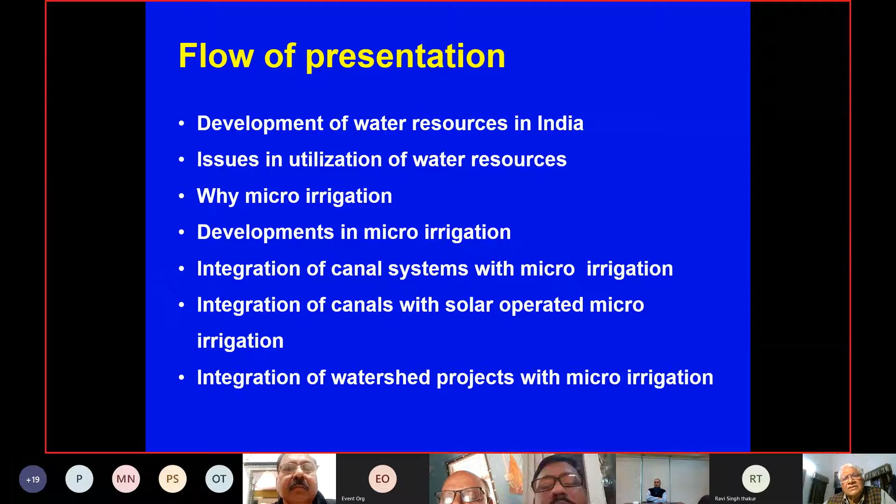हम माइक्रो इरिगेशन की बात क्यों करना चाहते हैं और माइक्रो इरिगेशन के डेवलपमेंट्स क्या हैं। Micro irrigation is not a very simple thing as we all understand. And then how can we connect it to large systems, micro irrigation's integration with large systems? And not only canal systems, but solar operated micro irrigation with canals. And then watersheds and water harvesting schemes and projects - how can they be integrated with micro irrigation?

Well, I need not take more time on this. You all understand that we have very limited water, and whatever water is available, only a very small component, 3% of that is usable. And out of that usable, 66% we are taking for agriculture. So agriculture, since it is a major consumer, its major responsibility also is there to use the water as efficiently as possible.

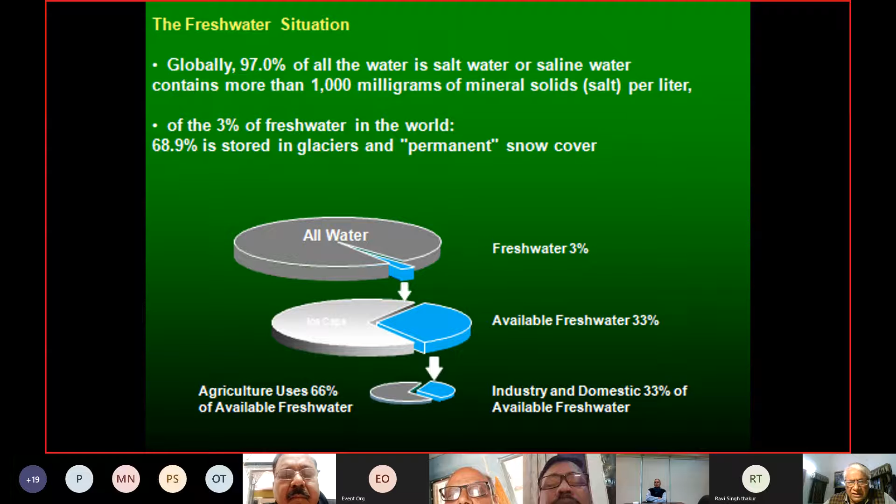Well, I will not go into the small video that was there, I'll just skip because of the time. Let's come straight away to very general statistics. You all know it, but just for the sake of making background for the real topic - we all know how limited water resources are. It is just 4% of the world. Land area even less, 2.3%. But population is not 16, but 17% today. So 17% population we have to feed, having only 2.3% of land area and 4% of water resource.

The demand of water for other sectors is growing very fast. We also know that other sectors like domestic, industry, and recreation facilities can pay more for water. So all the competition we are going to face in future days will be for agriculture. The blue map shows the distribution of rainfall, and luckily in this country we have the maximum variation possible, from zero rainfall to maximum rainfall in the world.

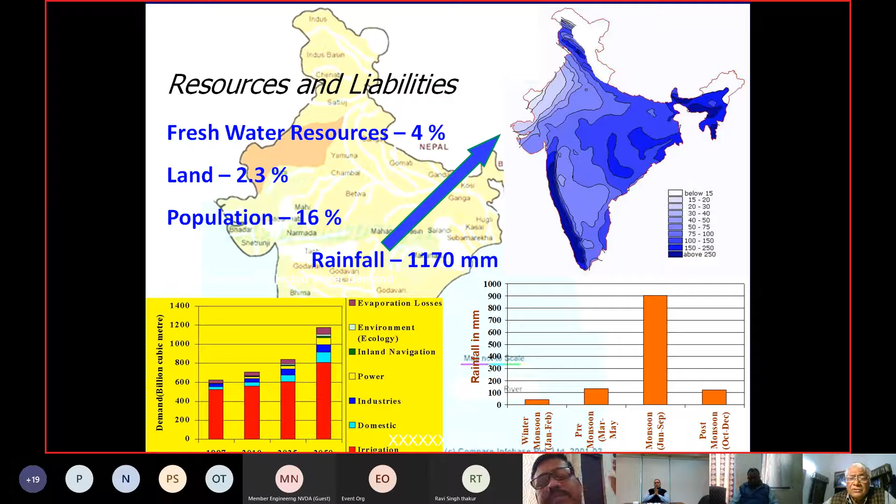This is an asset because we have the climate such that we can grow anything, any plant, any variety within the domain of our country. This is not possible in all countries, but our country gives us the possibility of growing anything.

Now, simple mathematics, you all are familiar that 4,000 billion cubic meter is available. Out of that, ultimately we are using only 728 billion cubic meter as surface water. So I'll not go into more detail.

If you look at how we have progressed in water resources, initially the water was under the control of the community. We had tanks, lakes, and all were under the control of the community. Every village has got 1 or 2 ponds, and the control was with the villagers, the total community.

There was very little intervention from the government side, about 20%, and individual interference was very limited, about 5%. But in the mid duration, the community control started decreasing, because the government intervention through construction of canals and tanks, the control started shifting to the state, to the government that you have nowadays.

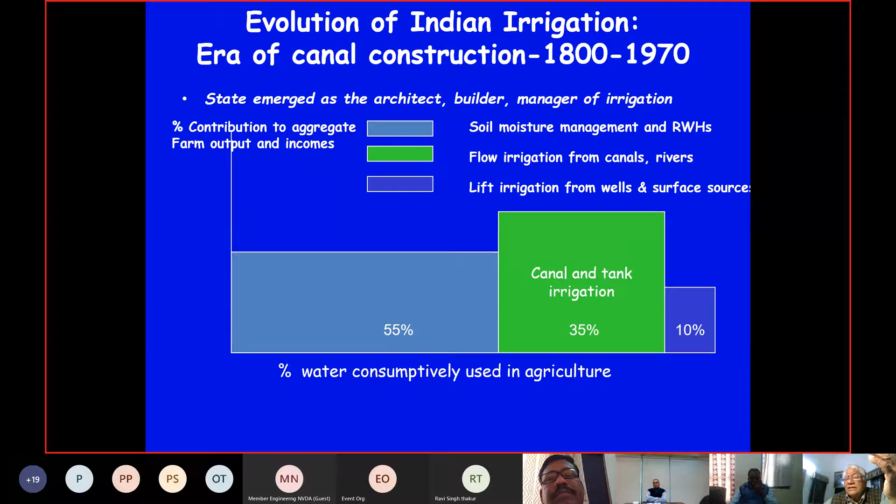And then individual control also started increasing, because individuals were somehow not satisfied, not getting whatever they wanted. So they started using water resources on their own, by their own wells. And the situation lately is that individual control has increased to a great extent, more than 55% of the total water resources are now under the control of individuals.

This is because of several parameters, several factors. Our community did not function well. The government intervention and control on water resources was not liked by the community and the individual farmers. Farmers found it more convenient and under their control to have their own tube wells, and started exploiting that, really senselessly at several places.

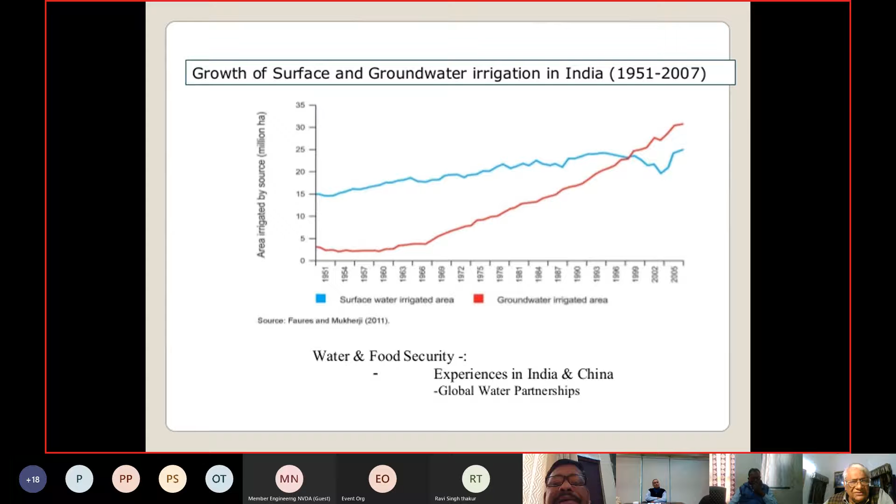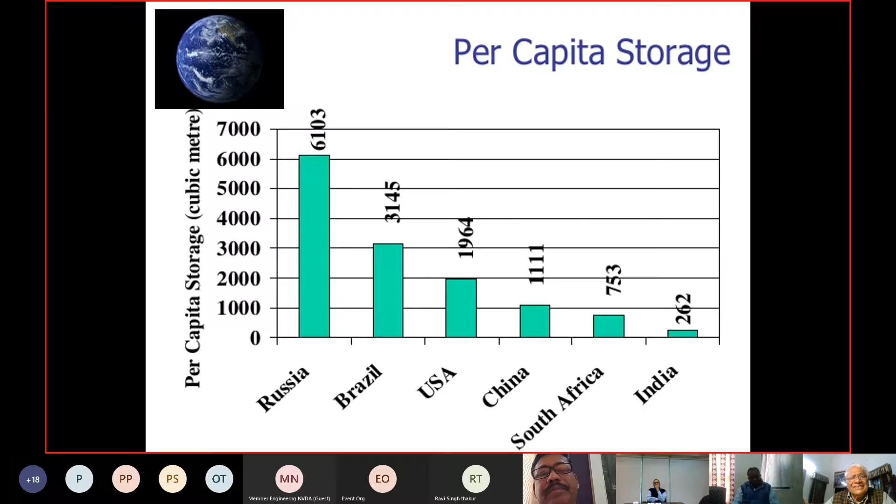On the other hand, all the government interventions and constructions of big dams, the total storage we have for emergency, is the least among all the big countries: Russia, Brazil, USA, China, South Africa. And if you want to go for more large dams, you know what sort of resistance we face. You have the best experience of the resistance given by different lobbies.

Notwithstanding that, coming back to the reality: population is growing fast and the water resources are depleting. The per capita availability has reduced from almost 5,500 cubic meters to just around 1,000 cubic meter per year per person.

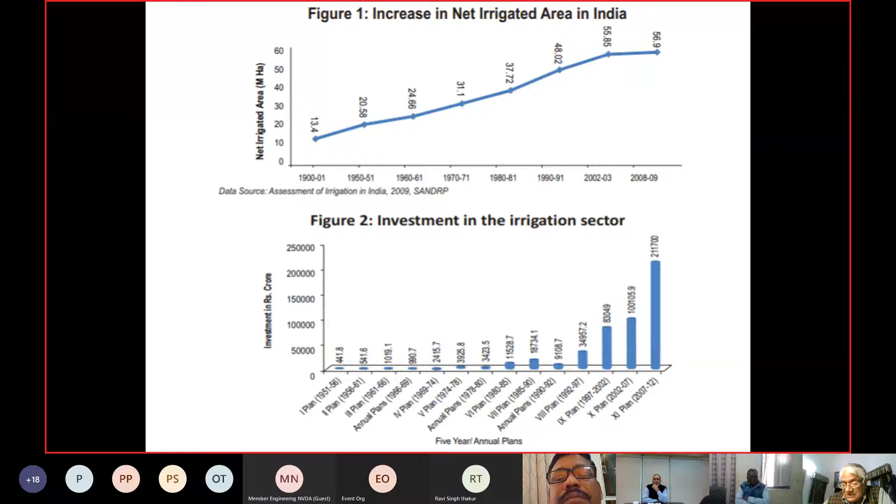So coming back to this, we cannot say we have not done enough. The government has done really wonderfully well in the development of our water resources, particularly after independence, and it is exemplary. There is no other example in the world. We are number one in developing water resources during this period, particularly for irrigation, by investing a huge amount of money, because increasing the irrigated area cannot come without cost. It comes with a cost as per our traditional practices. Now we'll have to look to something else.

But what is the negative side? The negative side is the gap between the irrigation potential created and the irrigation potential utilized.

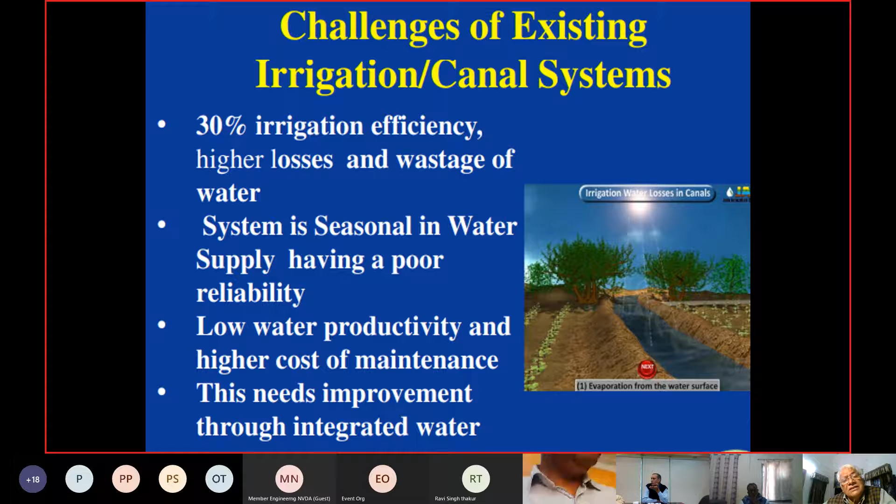Looking at the real issues, efficiencies are very low, particularly in our large canal systems. The seasonal matching of water availability from the canal with when the crop actually needs it is a bit difficult - there's an operational problem too. It's not a simple thing to do, but this is the problem, and because of this, low water productivity results, and efficiency goes down.

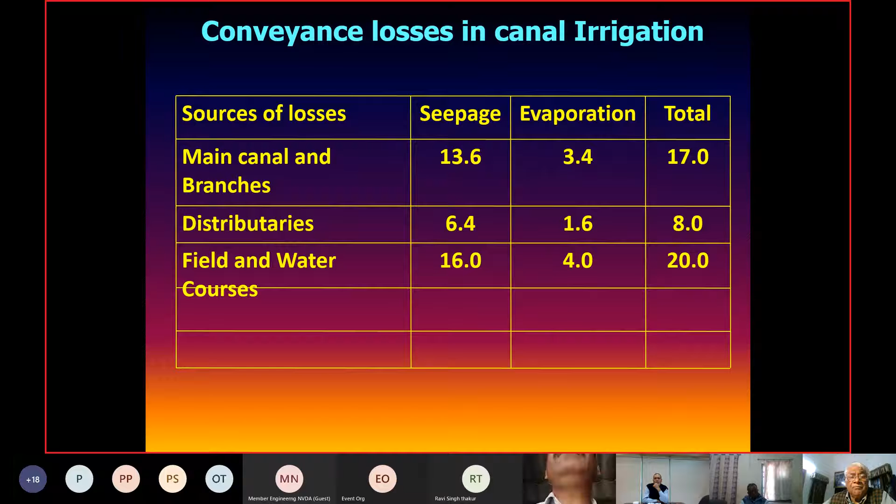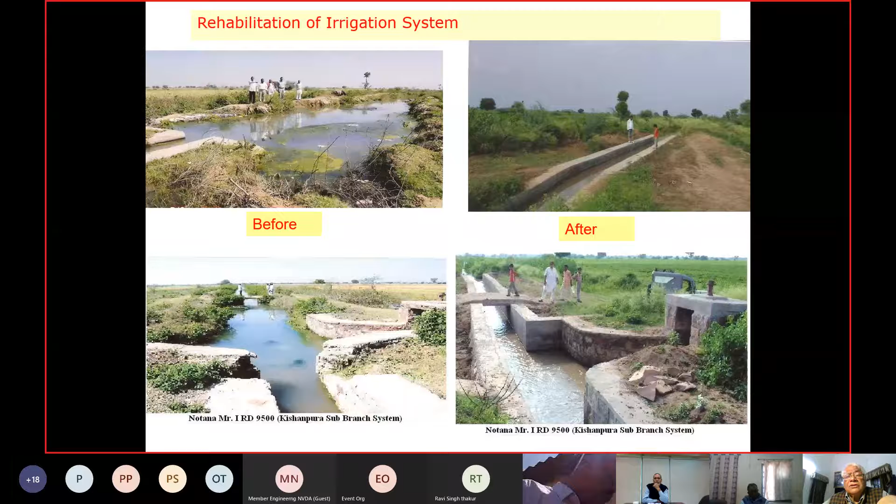Now, what can be done? Very simple things - the water courses, particularly the field water courses, are giving the highest losses. We need to address that, and how to address it is at least through proper maintenance. Maintenance of our distributaries and minors plays a very significant role.

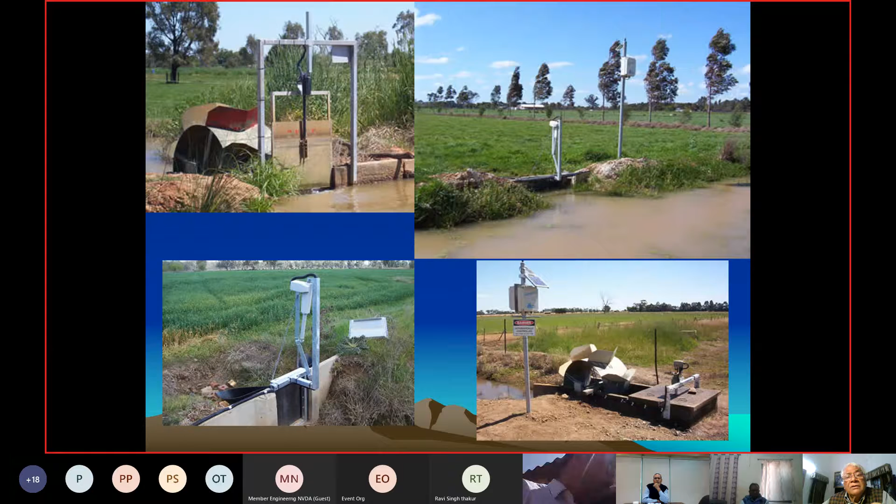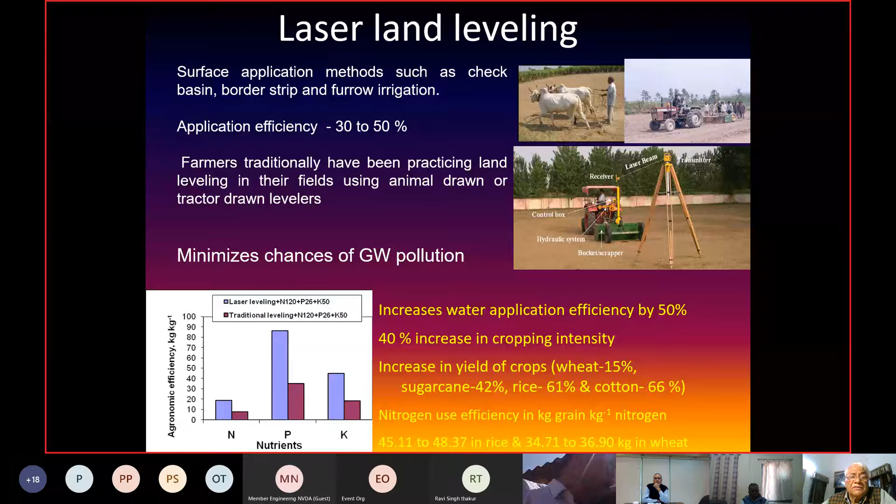What we are not doing, and what we need to do in future, is implement controls and regulations on the canals which can really be automated, like you are seeing at this automated gate. And more than all that, all the area being irrigated, if it is plain area, must be precisely leveled for higher water use efficiencies.

The last thing we can add into the existing canal system is automation - at different stages: at the distributary head, at the canal head, at the water course head, and at the field level, as you are seeing with the solar operated hydrant and metered pipes.

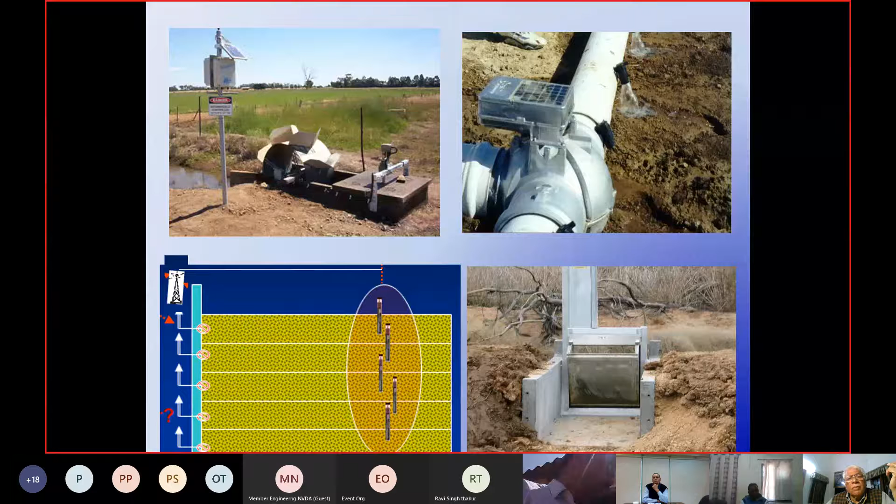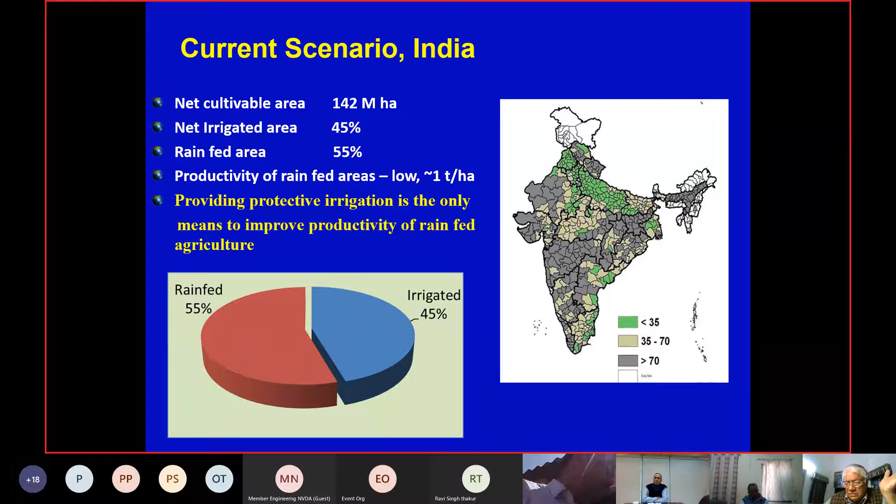With all the facilities and activities we have done, we are still 55% rainfed in the country, and that is very critical for our survival and food security. What are the options available?

The options are that the conveyance and distribution system has to be completed, which the Prime Minister, through all his might under PMKSY, is doing by selecting 99 projects and completing them fast, and Madhya Pradesh is doing very well in that. I think that's the way you can increase the irrigated area.

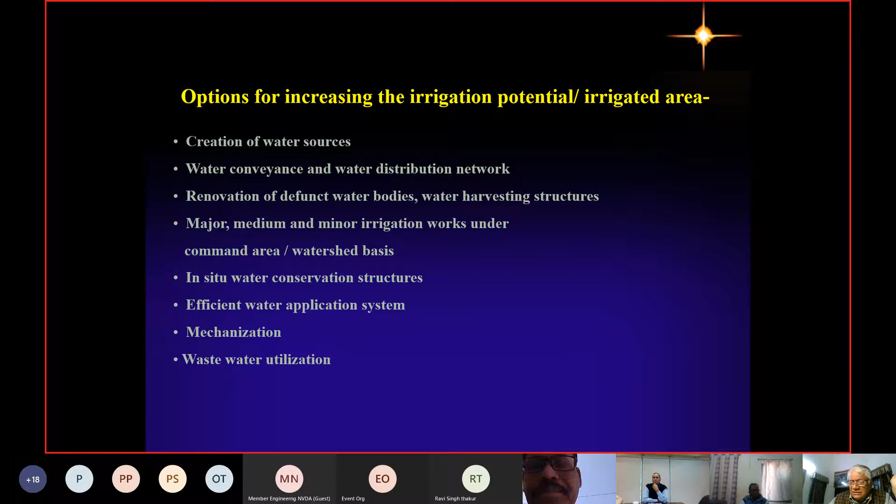And then major, medium and minor irrigation works under canal commands and watersheds have to be taken up seriously. In-situ water conservation, efficient application, and mechanization - these things are to be taken up simultaneously.

Now, this is a small picture I have taken from village Talwar in Alwar district. You can see just a 2.5 to 3 inch pipe from the well, and then an earthen channel in almost sandy soil. In an earthen water course, they are taking this limited quantity of water and carrying it for a few hundred meters. You can understand the amount of losses taking place.

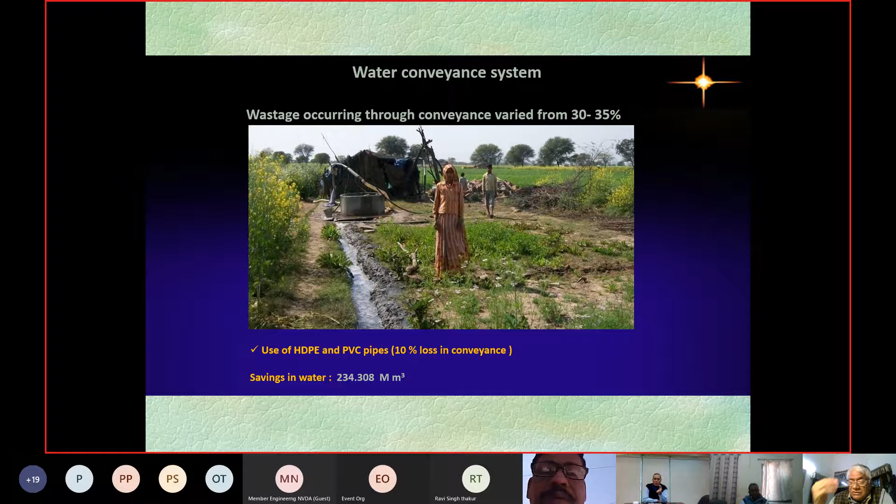Is this the way we should be using our water resources? Is this the way we should be using our energy, with this being run by diesel? You can understand the cost to the farmer for irrigating fields.

I have already discussed that a lot of investment has gone into developing water resources through canals, tanks and groundwater. When it comes to utilization, we have different methods - we all understand surface methods like check basins and furrows, and then micro irrigation.

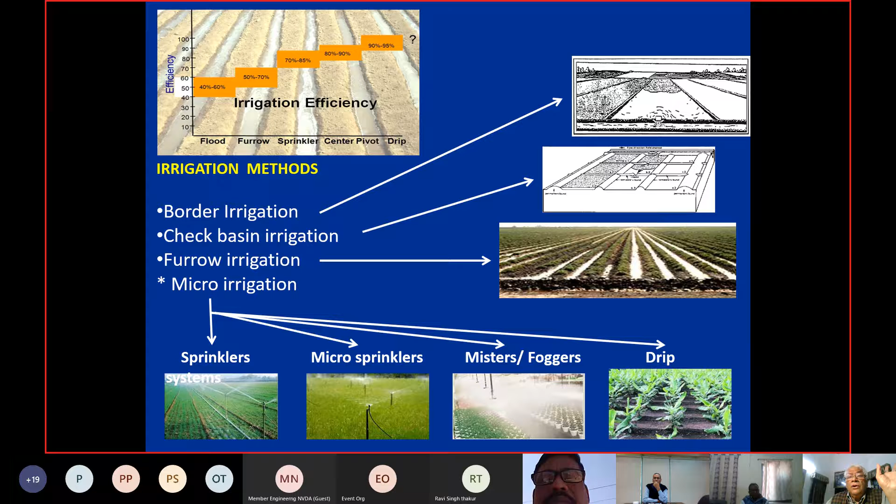This is the simple system of micro irrigation. The concept is very simple - from the source, whether it's a well, tank or canal, you convey the water under pressure through enclosed conduits to individual plants.

So what is done in this process? You are eliminating practically all the conveyance losses to zero, all the evaporation losses to zero, and there is no possibility of runoff because you are applying water at a controlled discharge and for a controlled duration.

If you are controlling the duration, you can ensure that water does not penetrate below the soil roots. And if it doesn't penetrate below the roots, there are no percolation losses. So practically you can eliminate all types of losses. Mind it, that plant requires as much water as it needs, whether applied through surface method or drip method doesn't make a difference. So that much water it needs, and we'll have to provide that much water.

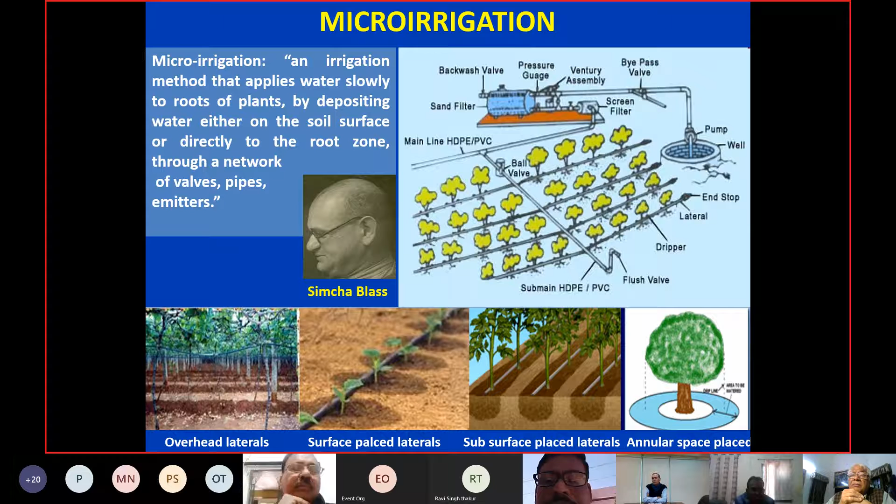The question is how the efficiency improves. It improves simply because we are able to cut down the losses. This micro irrigation system offers a scientific solution where we can practically make all the losses zero.

Besides saving water, it saves fertilizers. How? Because this micro irrigation system gives a possibility of applying water-soluble chemicals along with water, with very precise application into the field. It also saves labor, because once the system is laid out, you don't require labor to control or divert the water.

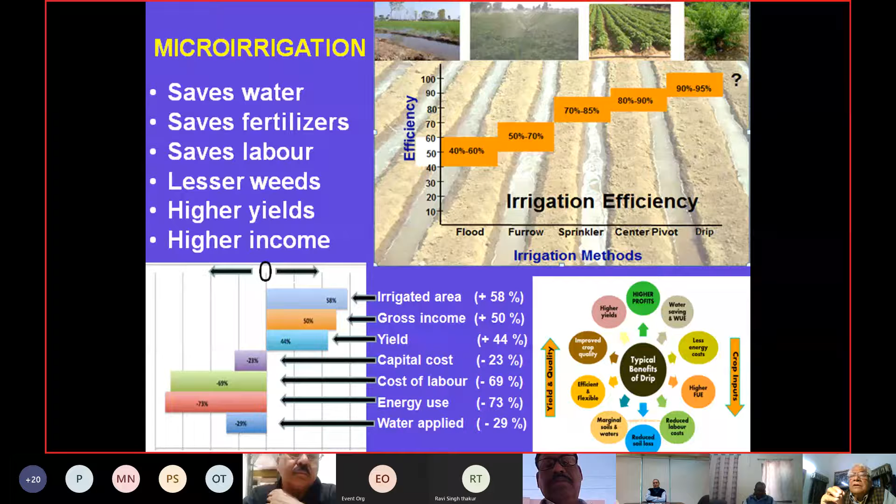Weeds will be less, yields will be high. Why? Yields are high because of two reasons: you are giving exactly the amount of water the plant requires, and there is no suffocation in the roots. Water is just adequate, and there is enough air for the plant's roots to breathe. So you give a proper environment for plants to grow, with enough oxygen and enough moisture.

You can see the simple concept. It started with points, as you can see in the very first figure. This was the very first concept of micro irrigation: you take a tube lateral and provide some kind of dripper or emitter, from where the water can come out just near the plant. It was used for orchards. Then later it was found that putting it on the surface creates obstructions for agriculture operations. So why not put it underground? That's how subsurface drip irrigation systems came into existence.

Then the question came: can we really use it for very closely growing crops? For example, if we want to grow onion or garlic, the plant-to-plant spacing is 10 centimeters maximum. Now in 10 centimeters, if you assume providing drippers at each 10 centimeters in the field, it is almost impossible. So we must have something else. So the system evolved where it is not only wetting points anymore — in engineering terms it is no longer a point source of water application, but a line source of water application.

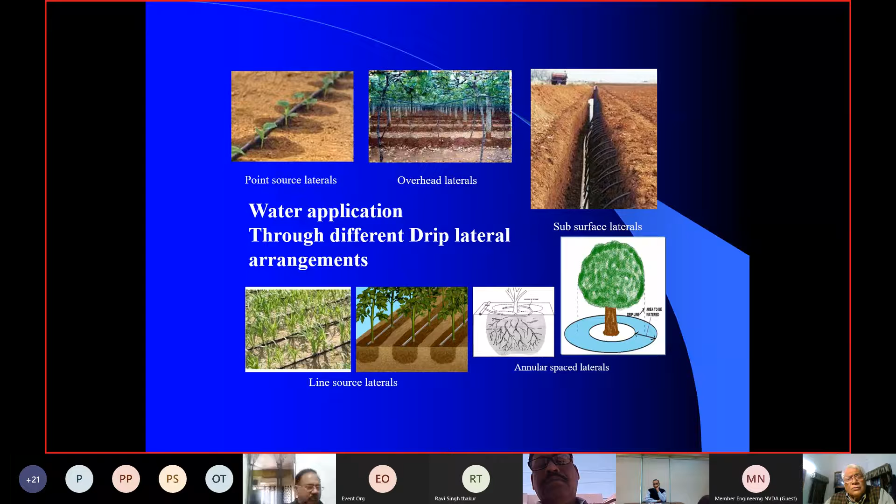Similarly, a lot of discussion, modifications, and research were done on large trees, on how drip can be applied on a large tree. It was found that if you adopt the first concept, it's not going to work — it requires much more water, not only in one direction but all around the plant. So there are flexible methods and flexible tubes laid all around. Another alternative found was to put two laterals on both sides of the plant and provide drippers closer to it. All sorts of such developments took place.

Ultimately, all these developments led to a situation where we can grow almost any type of crop — you can see here potato, onion, wheat, and finally we are trying, with a lot of research being done, for rice. Even for rice, it's being reported that the drip system is really a water saver.

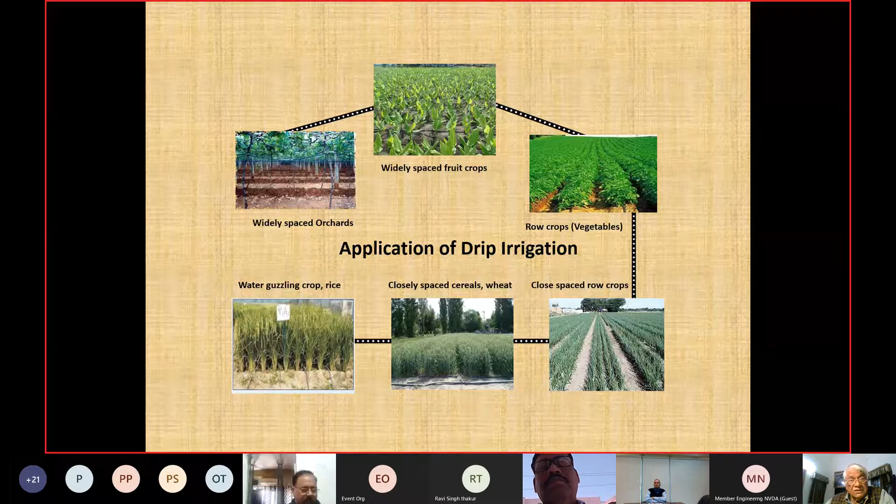In India, in 2004, under the chairmanship of Chandrababu Naidu ji, the then Chief Minister of Joint Andhra, there was a national task force on micro irrigation. At that time estimates were made — I had the proper opportunity and good fortune to be a member of this — and we estimated almost 70 million hectares in the country can be brought under micro irrigation.

And that was not all. The government is still pursuing and doing a lot in terms of policy development. Starting from 1992, when the first centrally sponsored scheme on use of plastics in agriculture was started, it was a scheme to partly fund or provide subsidy to users. Then in 1995, the Rural Infrastructure Development Fund was created.

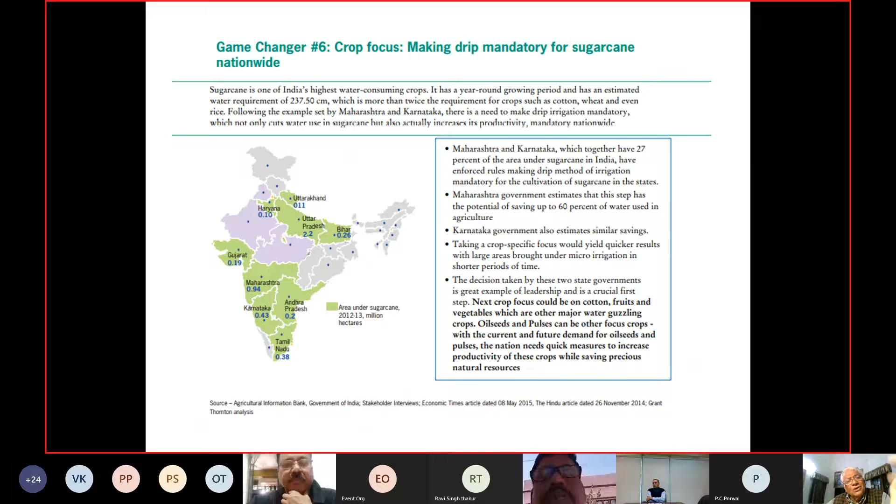So we need to promote drip irrigation for both these causes, and then per drop more crop. There cannot be any alternative other than micro irrigation or drip irrigation. So PMKSY in short pushes and suggests giving a big push to micro irrigation in the country. And it is said that if micro irrigation is made mandatory for sugarcane nationwide, it will be a game changer, because sugarcane is a water guzzling crop. And this is being tried in Maharashtra, your neighboring state, that the people who adopt it will get certain incentive, and those who do not will face some disadvantage.

If you look at the engineering aspect of this, then only we'll understand that it is not simply putting some laterals and putting some drippers. Micro irrigation is also as complex as your own systems.

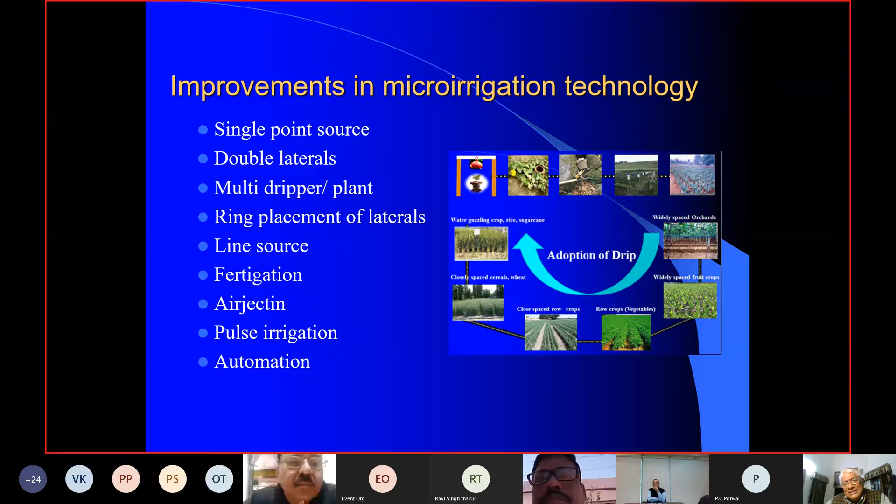Of course, time doesn't permit me to go into all the developments, but I'll try to cover the very critical aspect. In micro irrigation or drip irrigation, the most critical part, or the heart of the system, is its filters, because the water is conveyed in closed conduits at low pressure, at low discharge. So any impurity in the water will make the system useless. We must ensure that the water getting into the system or the field is perfectly clean. And for doing that, we need filters.

If you see the engineering aspect of filters, in the 70s we started having the gravel filter. Then in the 80s, we came to sand and media filter. And then developments took us to screen filter, hydrocyclone filter, disc filter, and all special purpose filters for special uses. So these are some engineering interventions in micro irrigation.

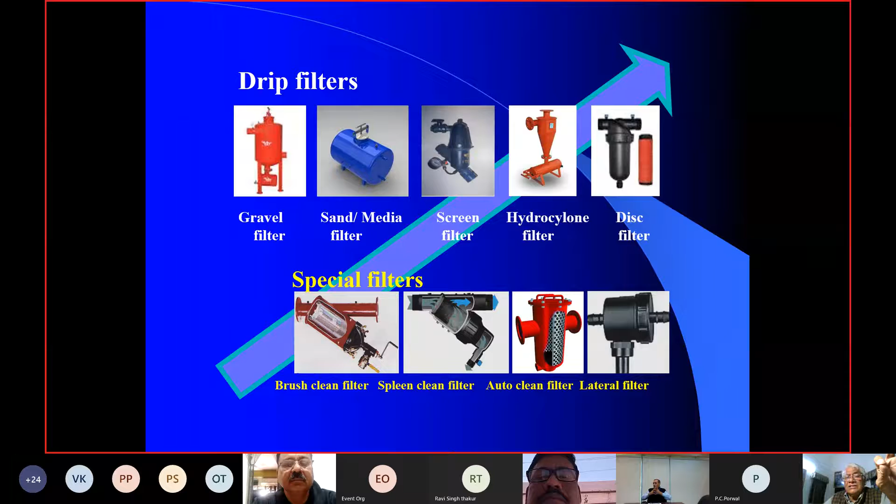Then I told you that fertilizer or any water soluble chemical can be applied with irrigation water. But the water flowing in a closed conduit, if we are all engineers, we can understand if you make a hole in a pipe where water is under pressure, it would come out. But if you want to inject something into it, you need some extra device. Otherwise it will not get into it.

So the first, simplest thing thought was that you take a sealed tank, fill it up with fertilizer solution, and from one side let a certain quantity of water get into this tank, and then take out the same quantity of water and join it to the main pipeline of the water distribution system. That's the drip irrigation system.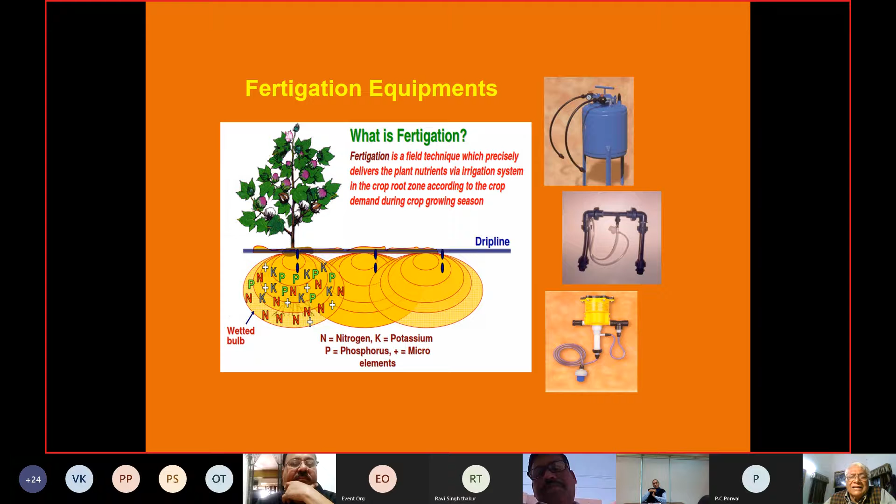Second is the Venturi. All engineering students are taught what a Venturi is. Any constriction in the pipe, a planned constriction and then again expansion, creates a situation of negative pressure. Using that negative pressure, suction is created, and that suction can be used for applying anything into the water. And for precise applications where you can apply at a controlled rate and controlled amount, fertigation pumps are available. So these are developments in fertilizer applicators.

And as the government, you have seen how many policy initiatives the governments took, and government was trying hard and putting financial support. What happened? Our industry people, many of them, came up. You may be surprised to know we have more than 300 micro irrigation manufacturers in this country.

In the micro irrigation association, that is the list. But what happened? They started making their own things. They don't follow any standards, they don't follow any quality. So it was a big problem for us. How to control that? Then in Bureau of Indian Standards, a special committee was created way back in 1985.

And then we started taking it component wise. I'm happy to share with you that I have served this committee for a long time, and I still am a member of this committee. We have standardized all components of micro irrigation. Now, any manufacturer in the country must follow this norm if he wants to participate in the government scheme of micro irrigation, that is, the subsidy scheme of the government.

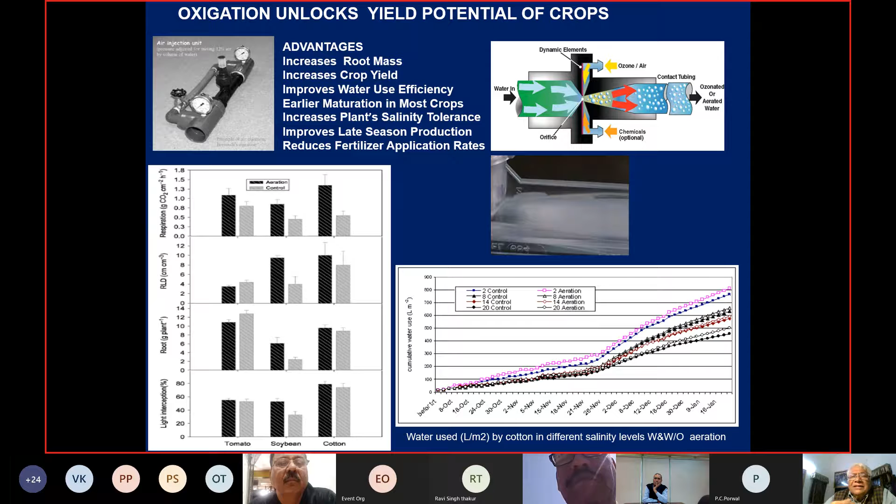The latest development, since we are engineers and we get interested in new things, is air injection. This is a device similar to a Venturi. What you are seeing here is that a solution of fertilizer and water is already flowing in the pipe. We want to add air to it, a controlled amount of air along with this water. Why? Because in the root zone, where the water is dripping near the plant root, the roots don't get suffocated, and they get an adequate quantity of oxygen as well. This is the latest development, and it's being tested.

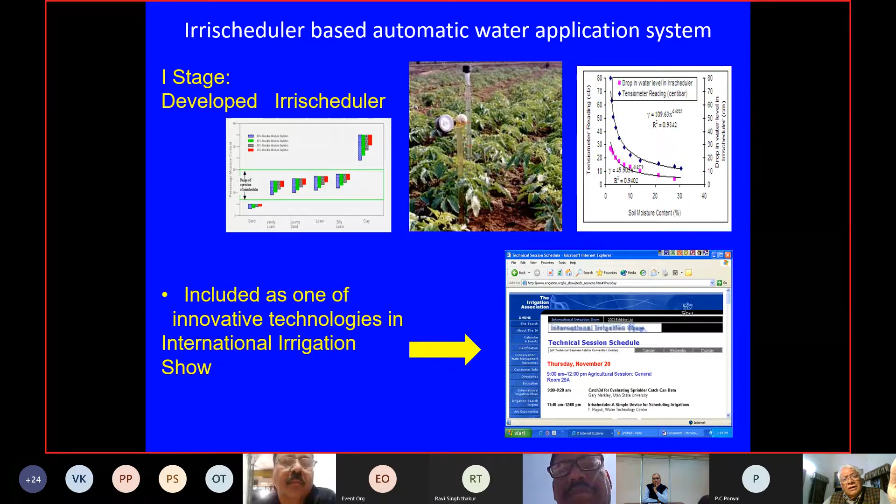Automation everywhere in the world is the main thing being done, starting from simple devices like tensiometer, green seeker, infrared thermometer, plant canopy analyzer, and then smart plant water. We have come to a stage where the world is using phytomonitoring applications. These are devices or processes for monitoring plant tissues, leaf tissue, fruit tissue, stem tissues, interpreting the deficit of water, and then applying only that quantity of water. So that is the ultimate, that we can precisely monitor and apply the exact quantity of water required.

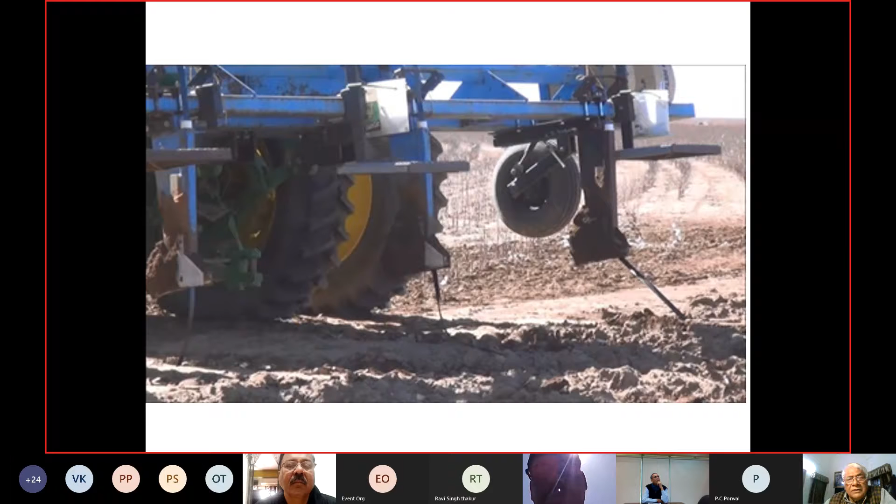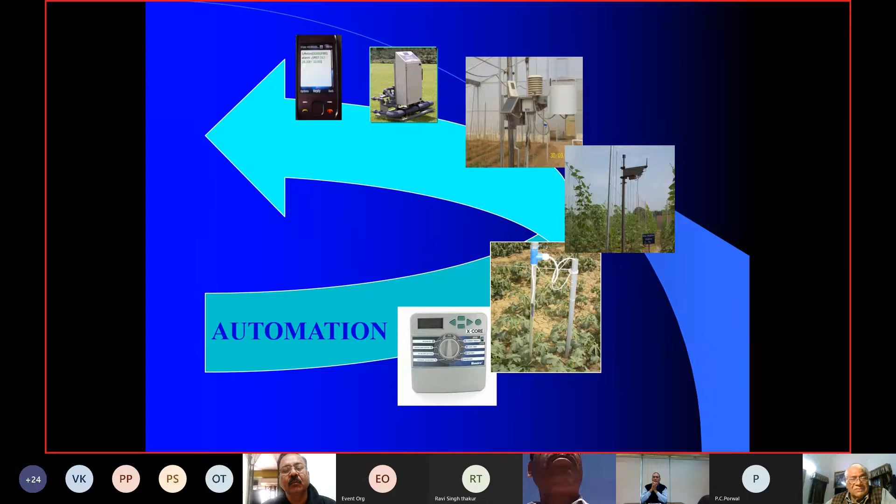This DOMIS is available on the net. Anybody who wants to design a drip irrigation system for any crop, any soil, any climate within this country, just use DOMIS on Google, and all the data has been embedded into it. You may not worry about the climate there, the type of soil, the crop you are growing, its requirements and others. Everything has been given in, so it requires the least amount of data, and this decision support system is available free of charge to anybody on Google.

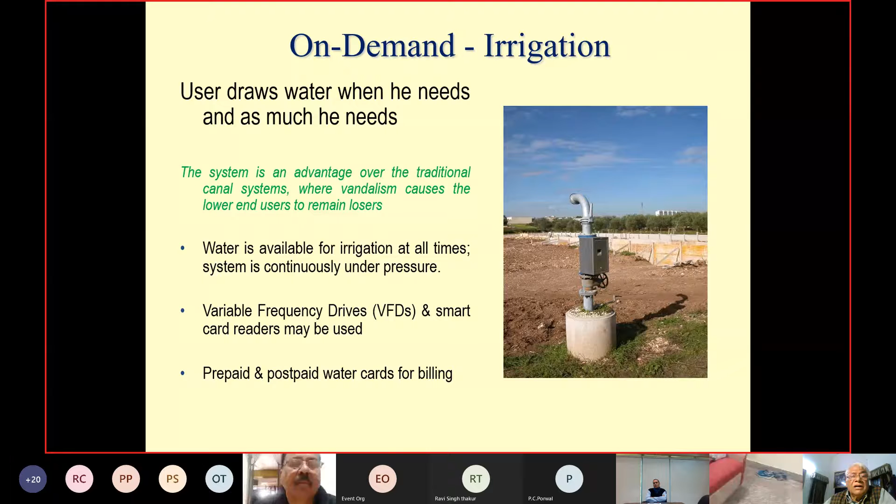On-demand irrigation systems are the latest added to micro irrigation. The pressurized pipe has water available under pressure, and ATM type of boxes are there. You just put your card inside, and it will know for how long the water is to be delivered from here, and the water will operate. Water will come out for that much time. So these are the on-demand irrigation systems.

And then finally, the pricing. You will all understand that price is a very difficult thing to talk about in this country, on price of water and price of energy, particularly if it regards agriculture. But anyway, sooner or later we'll have to think of it. Maharashtra has already taken a lead, and maybe other states will follow. As a result of all these efforts, we have already crossed the 10 million mark, 10 million hectares under micro irrigation by the year 2017.

The present situation may be close to 15 million hectares, and we are progressing well. But the potential is 70 million hectares as estimated by the task force, so we are far away from that. We will need much more time to reach there.

If we have to think of linking micro irrigation to large canal systems, there could be a simple way: if water is available at a slightly higher level, use siphoning and then put the tubes with drippers and emitters. That is the simplest way of doing it.

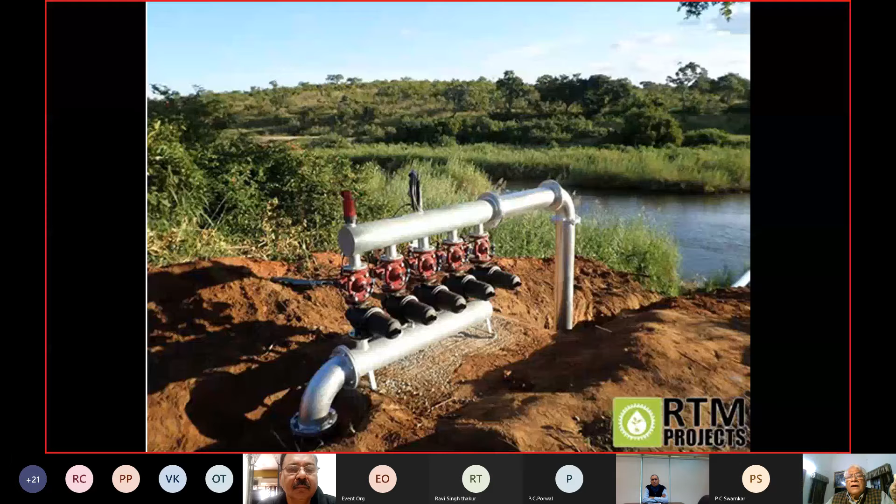Another way is to pump from the available source, then feed it to the filters you are seeing here, 5 screen filters in the line. After filtering, it enters the main drip irrigation system. Again, here this is direct pumping from the distributory.

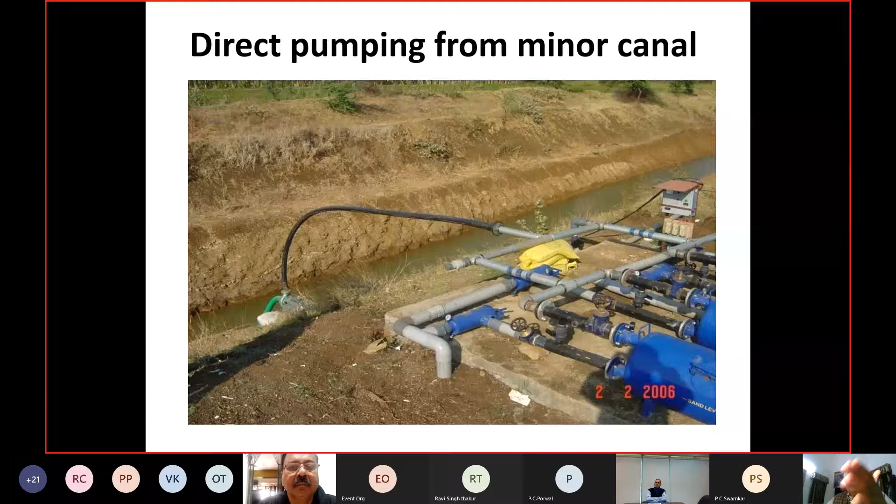This is a photograph taken from Anantapur. The water is being pumped using a float in the distributory, coming to a head of the filter unit, and from the filter unit it goes to the farmers' fields.

This is not in India, it's a picture from Brazil, and they are using elevated canals. In India we don't have elevated canals, but if this head is 1 meter or more, we don't require additional energy for the drip irrigation system, and it can work under that pressure. That's what is happening here - you can see the elevated canal, water is being pumped into the headworks at the filter units, and then it is distributed into the field.

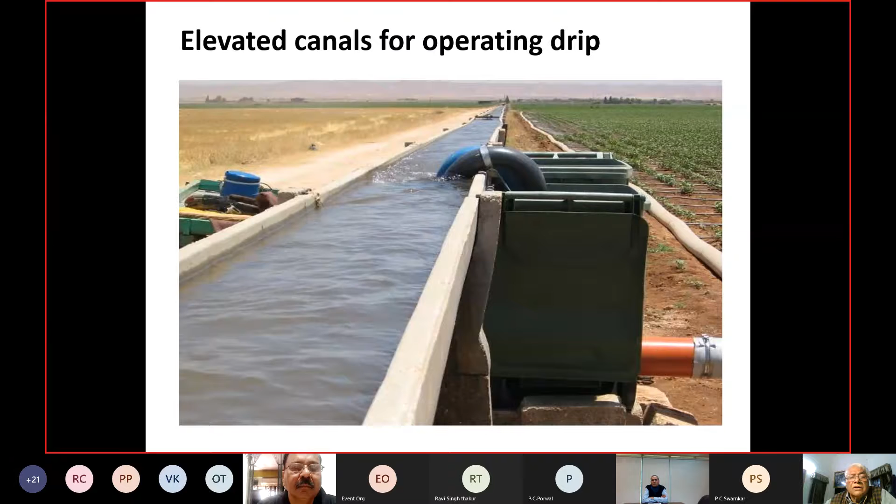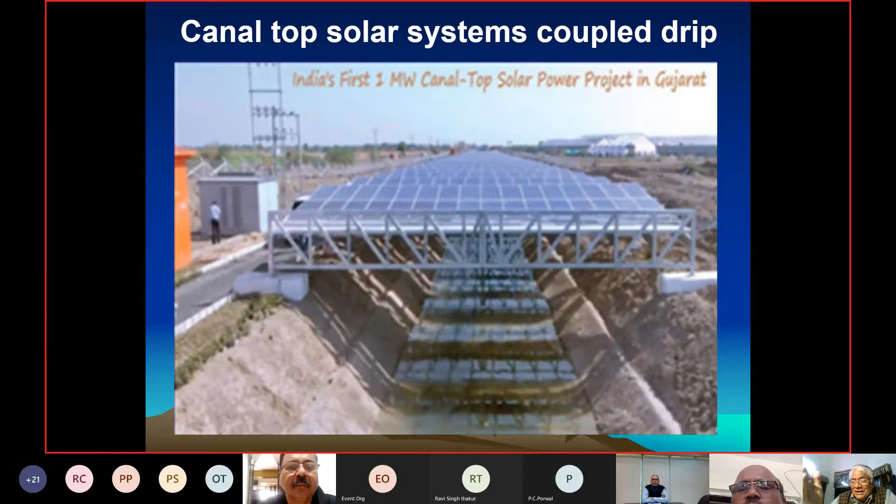This is lead work done in Gujarat. They put up solar panels on the canals, saving evaporation and keeping it cool. That gives more energy and doesn't require additional land. That is the biggest thing, because farmers will simply not agree easily to give up their land for putting panels or anything outside of crop cultivation. So this is one of the options.

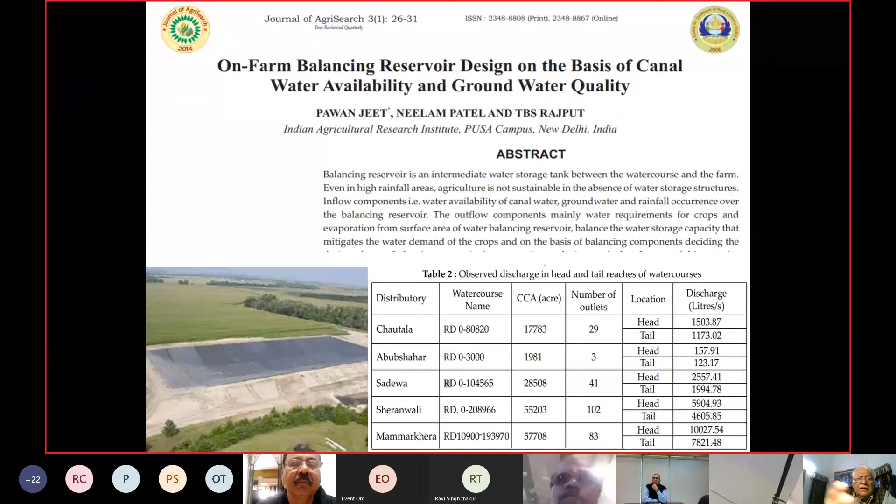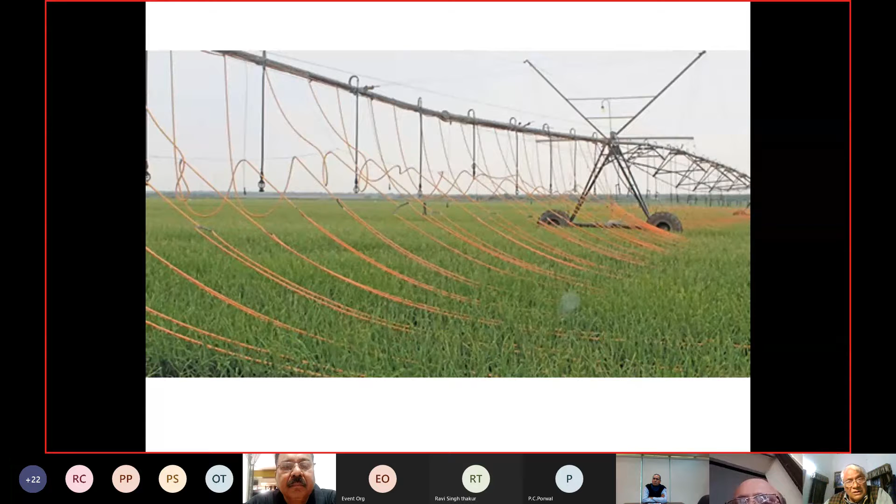You must have seen center pivot systems - many center pivot systems run sprinklers. Most center pivot systems that were built were made for sprinklers. But lately they are also realizing that there is a water shortage, so they have started putting laterals. So what you are seeing is a center pivot system, but instead of using sprinklers, laterals are also provided, and these laterals keep rotating along with the arms of the center pivot, as in the normal case of sprinklers.

How can the drip system be attached or combined or integrated with the canal systems?

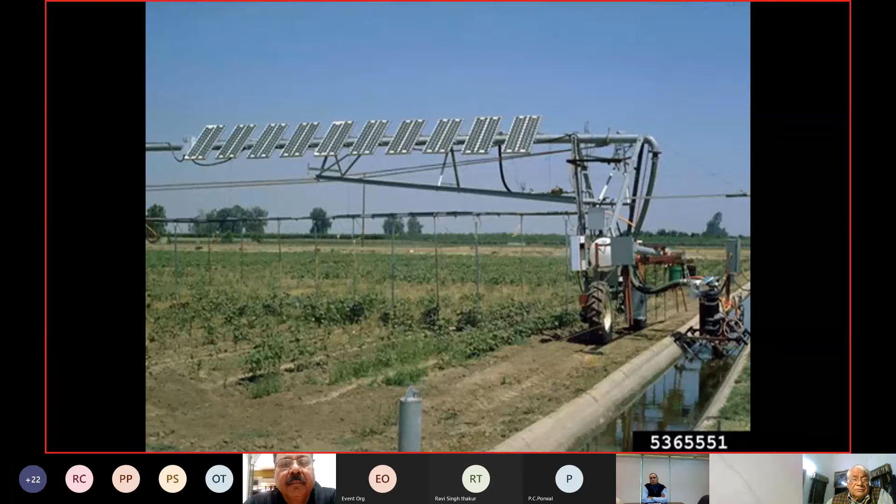In our own country, many of you may know, the world's largest drip irrigation project is executed in Ramthal, Karnataka, by Krishna Bhagya Jal Nigam. It is a 24,000 hectare irrigation system. I feel happy to be a part as a consultant in this project, and we had to face a lot of negativity from the government funding side. This is a government funded project, so the finance department of Karnataka, with great difficulty, agreed. In the picture, the engineer is talking to the minister, who was himself an engineer, so that was a real good help and support. That's how we could get this whole thing done.

The whole system, covering the entire 24,000 hectares, is completely automated, to an extent that every farmer in his holding has been given an automatic valve and a schedule of operating that valve. Beyond that valve, a manual valve is provided. A farmer has been told that his share of the automatic valve will open for a particular duration, and if he wants water, he operates his manual valve and uses it. Up to that extent, this automation has been done there. The system has been running perfectly well for 3 years now.

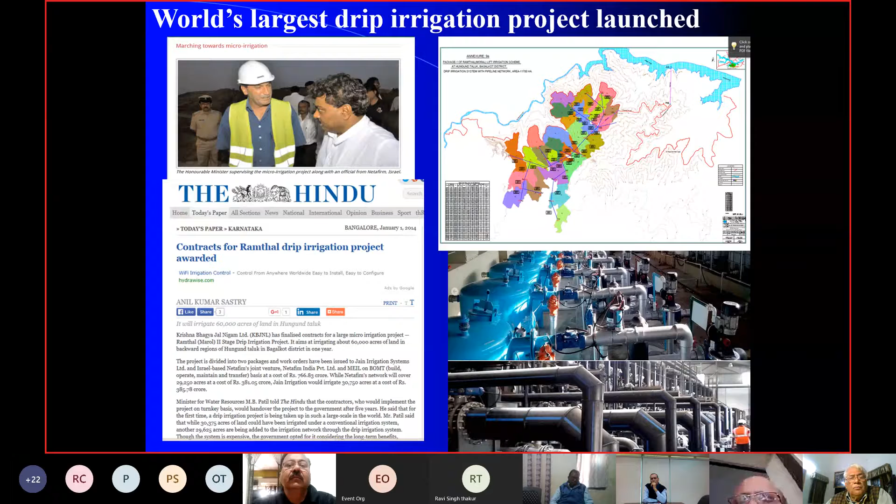The advantages are available on the net. You can just search the Ramthal project and you will find all these details, so I need not bother here.

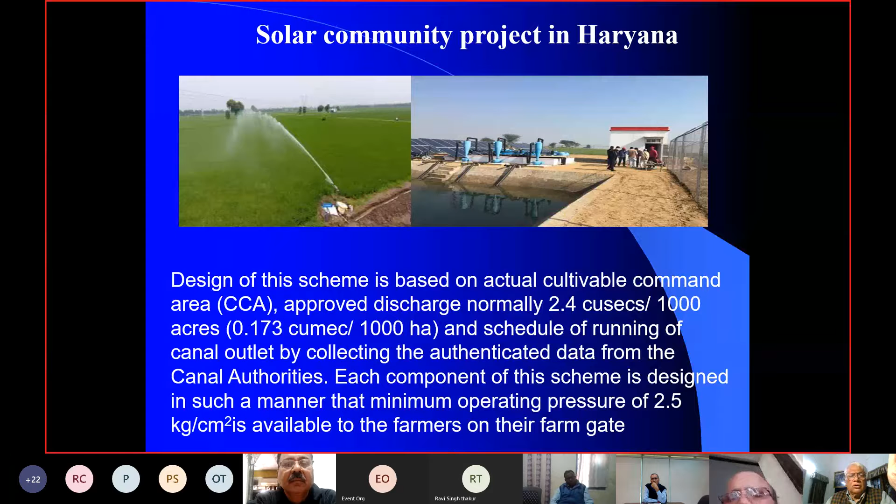Another community project in Haryana - I'm talking about this because the leading farmer there was awarded by our International Commission on Irrigation and Drainage in Indonesia just a couple of years back. What he did was spare his land for developing a pond, storing water, putting in micro irrigation systems, and then supplying this water to nearby farmers on a community basis. There are really good stories, and the ultimate project we have is at Rajwal.

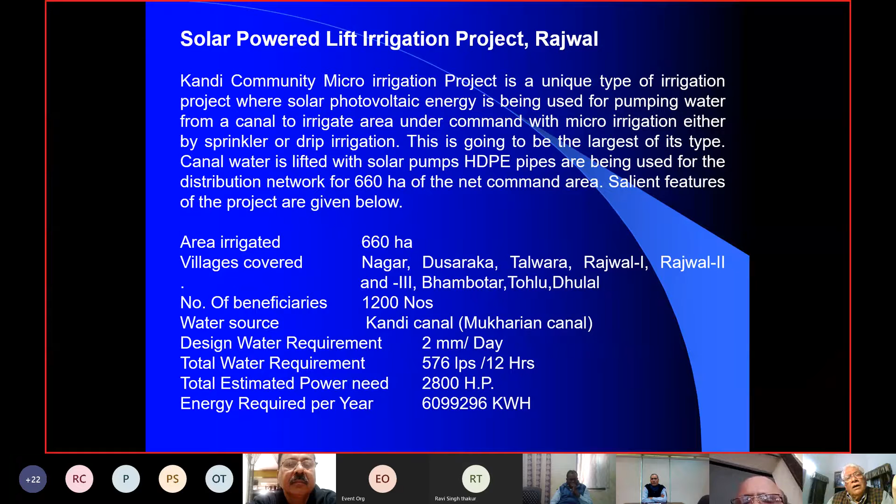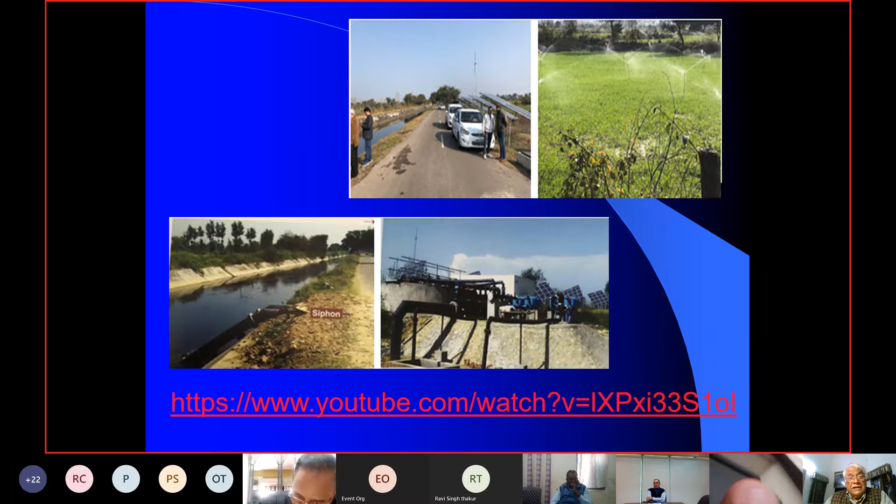But now, by combining or integrating solar, canal and drip, it is possible to irrigate, and we are able to irrigate the higher reaches of the Kandi area in Punjab. The details of this project also you will get on the net, so anybody interested can find the details there.

And that's not all. We have a long list now based on the successes of these few big projects - these large irrigation projects are being taken up by different state governments. Now, regarding watersheds, there used to be different watershed schemes. You all are working in the field.

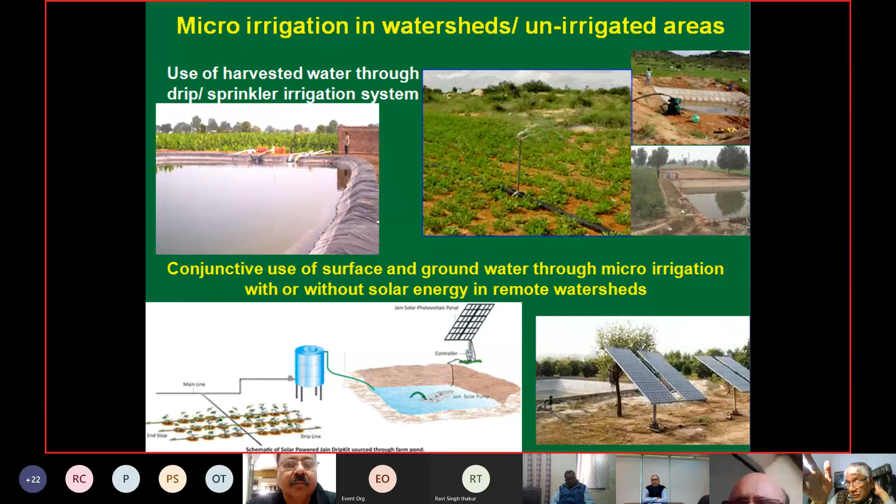You can use solar energy also for this purpose. In hilly areas, it is really difficult to irrigate because of the undulating terrain, but it gives a very positive vibe for using micro irrigation, because this undulating terrain gives you natural head, natural pressure. So if you design properly for a situation, additional energy may not be needed - hydraulic head may be sufficient to operate the micro irrigation, as it is a low pressure system.

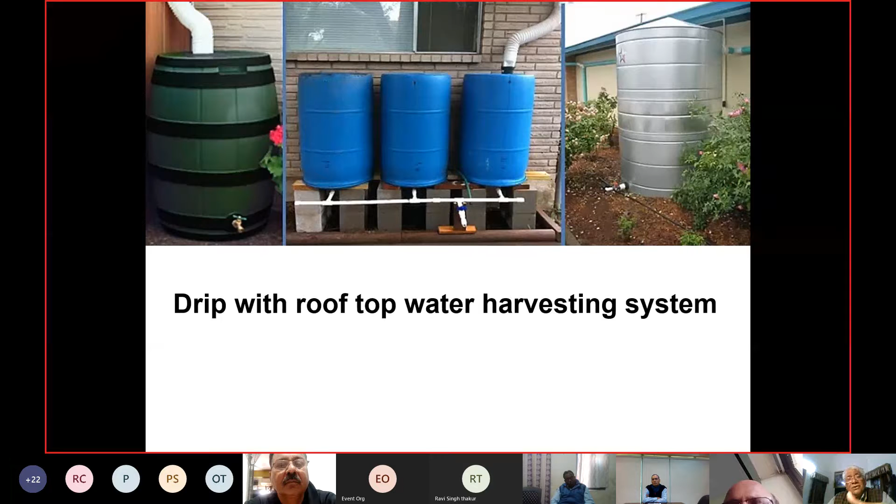Finally, rooftop water harvesting - you can integrate it with water stored at a little higher level, which can give you enough head, and then connect it with your micro irrigation for your garden at least. As in this case, you can see the water is being stored there, and then it can be used through micro irrigation.

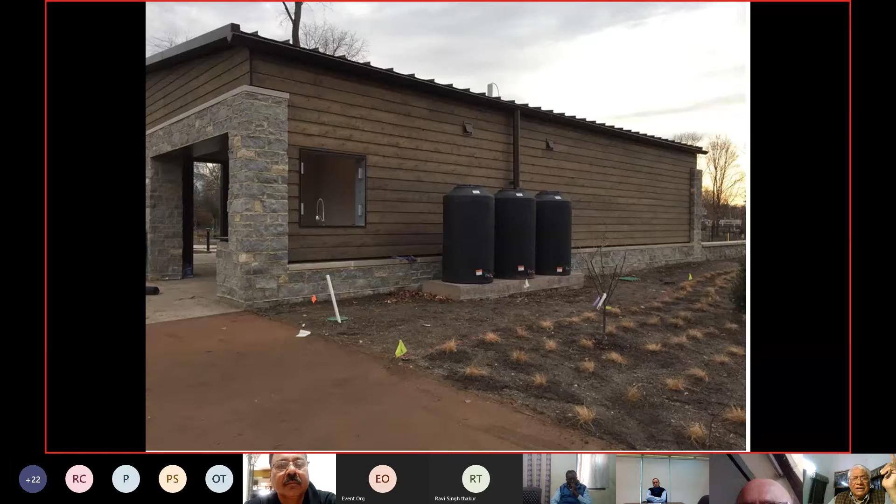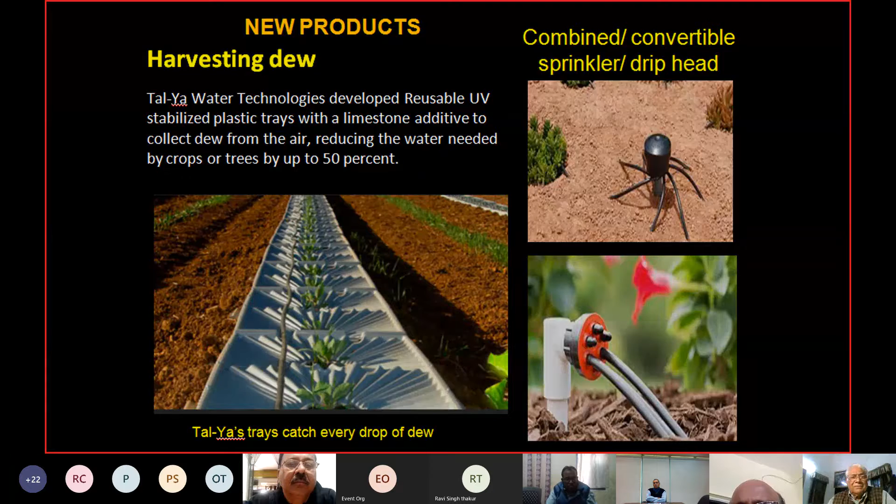The latest in water saving you will find is the harvesting of dew - no more water, just harvesting dew. For harvesting it, there are reusable UV stabilized plastic trays with a limestone additive, so that it collects dew from the air and channels it to the center, because of its shape, where the plant is, meeting a certain quantity of the plant's water requirement. That is the ultimate. Thank you very much, I think with that I will close.